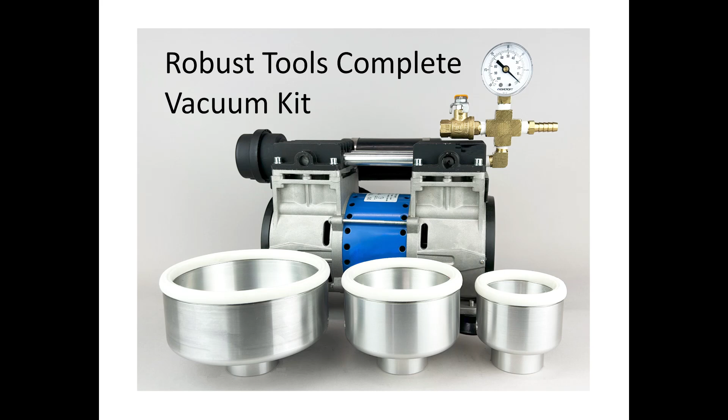Let's start with an overview of our complete kit. We have a two-stage 4 CFM oilless pump. There's a hardware kit that includes all your hoses and a filter, and there are three chucks, a 3¼ inch, a 4½, and a 6 inch. This is available as a complete kit, or you can buy all these components a la carte if you want to build your own system.

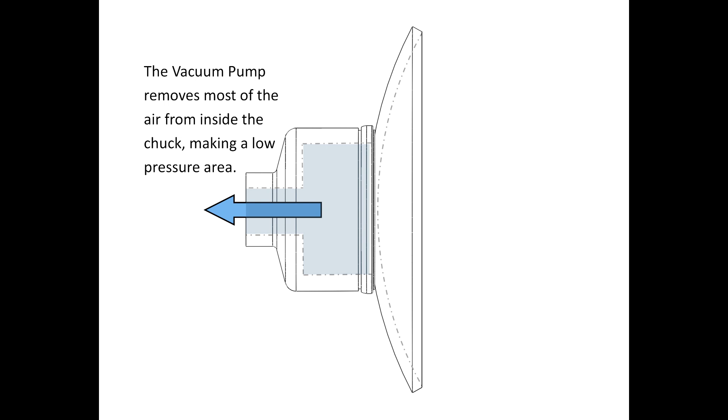All Robust vacuum chucks are machined from solid 6061 aircraft grade aluminum, and they feature a flexible 3D printed seal. Vacuum chucking works by removing air pressure from part of a system so that the ambient air pressure can work against the workpiece and hold it onto the chuck.

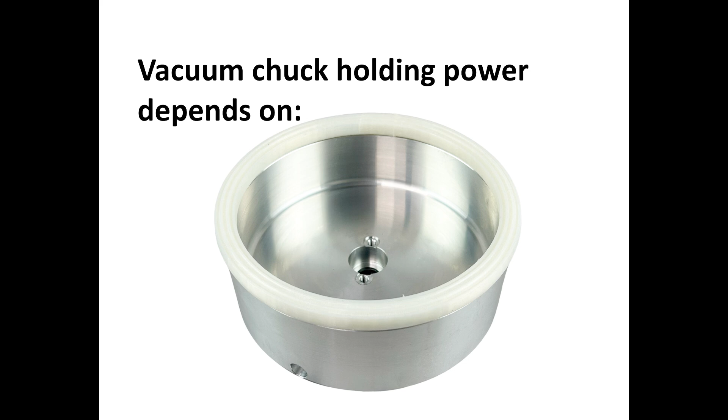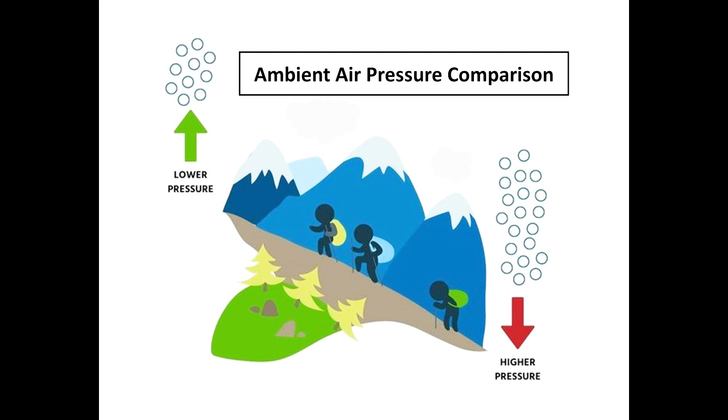Your vacuum chucking holding power depends on several things. One is the ambient air pressure. How big is your chuck? And what is the capacity of your system to generate a good vacuum? Ambient air pressure is going to depend a lot on your elevation. Down at sea level, you have 14.7 psi helping you, but you get up to elevations like at Santa Fe, you drop down to about 11.

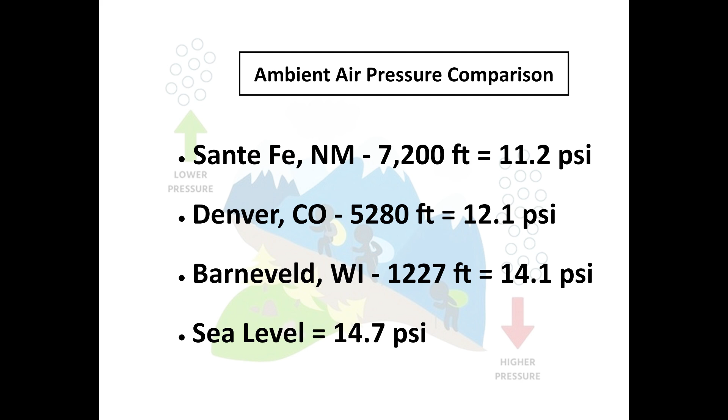All things being equal, the bigger the chuck, you have more surface area and more holding power. Our small chuck, 3¼ inches, will give you about 45 to 85 pounds. Jumping up to our 4½, you'll just about double your surface area, so you're at 85 to 170 pounds. And our big chuck at 6 inches can get all the way up to 320 pounds of holding power.

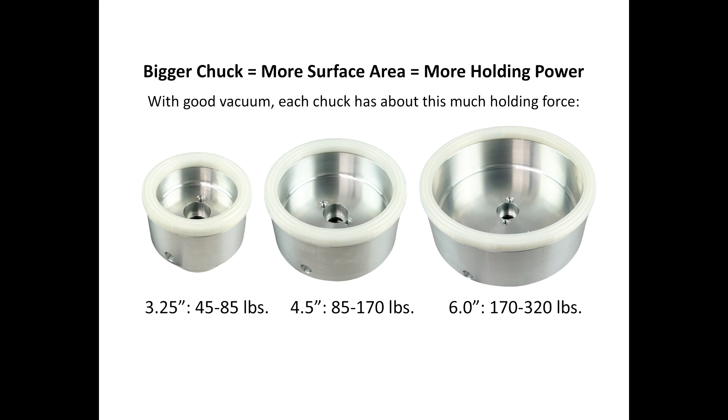Some other things affecting how well your vacuum system is going to work is the capacity of your pump, and are there any leaks in your system, including wood porosity. Let's look at the hardware setup that you get if you buy your system from Robust. We start out with a quality gauge so that you can know how well your system is performing at any given point. There's an inline filter to keep dust out of your pump.

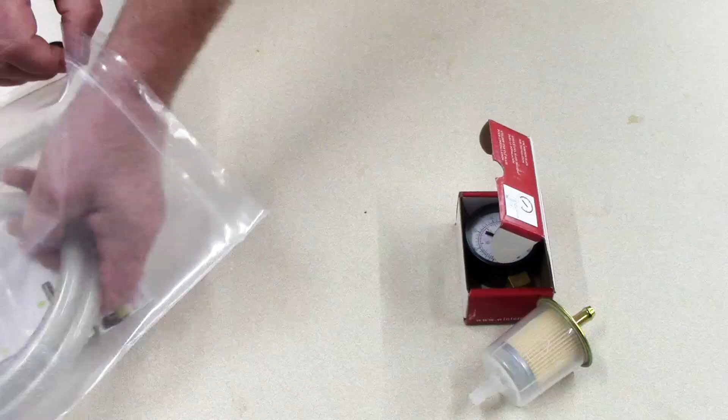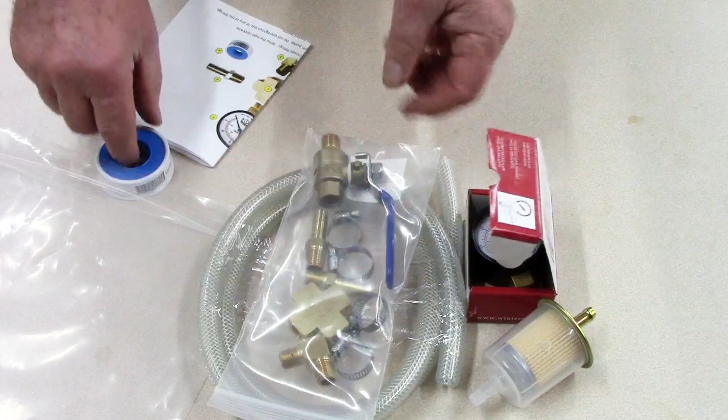There's some heavy-duty reinforced hose to connect everything together. All your hardware components, including hose clamps, etc., and your ball valve, more about that later. Some Teflon tape to make sure everything goes together without leaks, and a set of instructions. Here's the hardware kit and pump fully assembled.

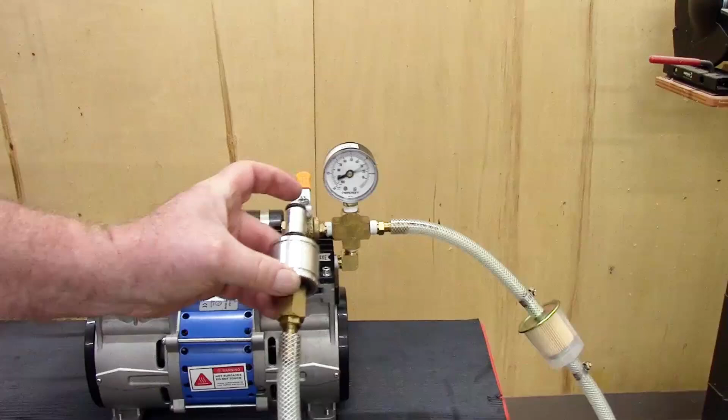One way to do a quick check on your system is to simply hold your finger over the end of the hose. In this case, I've got a vacuum adapter already installed, so I'm testing the whole thing. And you can see that the vacuum gauge is moving, and in this particular setup, it's going over to about 25, 26 inches of mercury, which is what I would expect at our elevation. I'm also demonstrating how the ball valve is used to bleed off vacuum, and we'll show how that's useful in just a little bit.

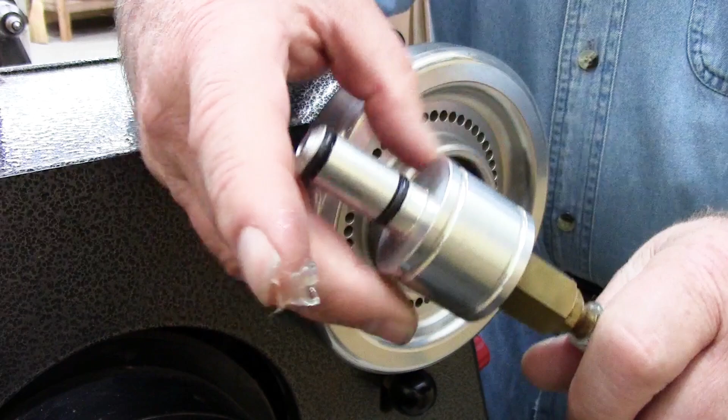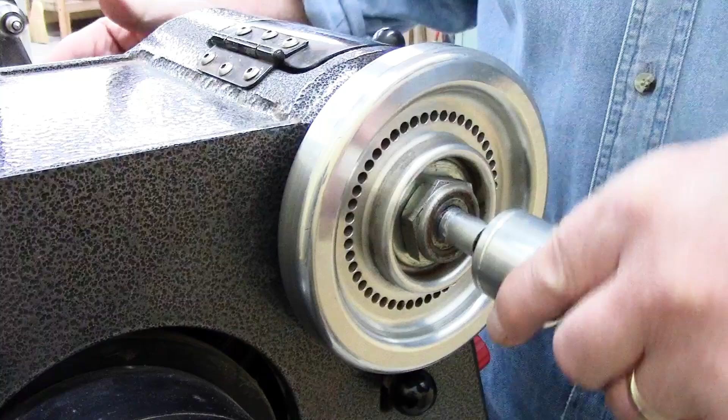Now, this is the rotary adapter that is applicable to Robust lathes and to Powermatic 3520s. I'm going to put a little petroleum jelly on the O-rings before I insert this. You can also use grease or other light lubricant. To use this style of adapter, simply slip it into the end of the spindle. There are 4 seals inside the housing that prevent vacuum leakage.

When you turn on the lathe, the housing will spin, but the hose will stay stationary. When you're done, just simply pull it out. If you don't have a Robust lathe or a Powermatic 3520, we've got a different system, and we'll show you that in just a little bit.

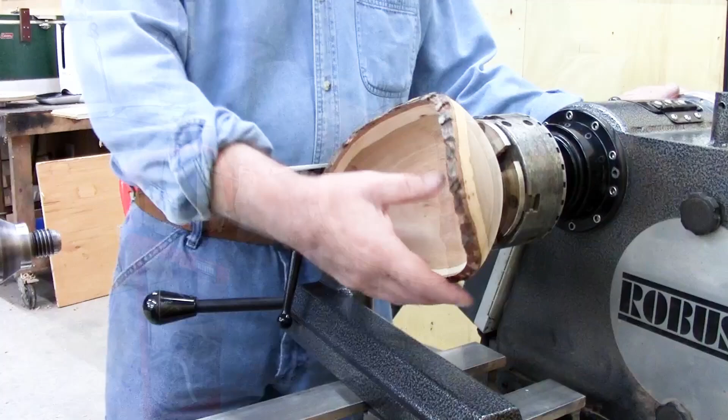Well, let's move on to some actual vacuum chucking. This is a natural edged cherry piece that I turned. I've sanded the inside and I've rough turned the outside. I'm going to leave it on the chuck, and I'm going to show you a reverse chucking technique. I'm going to use a chuck adapter.

It's threaded 3/4-10 on the inside and 1¼-8 on the outside. And I'm going to put that right on my live center. Any live center threaded 3/4-10, you can use one of these chuck adapters. And now I'm going to screw the chuck onto this end of the lathe, and I'm going to install my vacuum chuck.

And then I'm going to slide the tailstock up and have the piece make contact with the vacuum chuck. I'm going to turn on my vacuum, and then I should be able to unchuck the piece and pull the tailstock away and have the piece be fairly well centered onto the vacuum chuck.

For added support, I'm going to use my live center, but I don't want this sharp point. So the Robust live center is built so that I can take this point out and I'm going to turn it around and bring the flat end and have that stick out of the live center just a little bit. And that flat end is going to support the work and I won't be leaving a mark on the bottom of my piece.

You'll see I've got a little circle drawn on the bottom of the piece, and that's dead center. And when I bring my tailstock up, you'll notice that that circle is not running concentric. So what I'm going to do is use that ball valve that I showed you earlier, and I'm going to bleed off almost all the vacuum, and that'll allow me to shift the piece just a little bit and get it repositioned so that this base is running true.

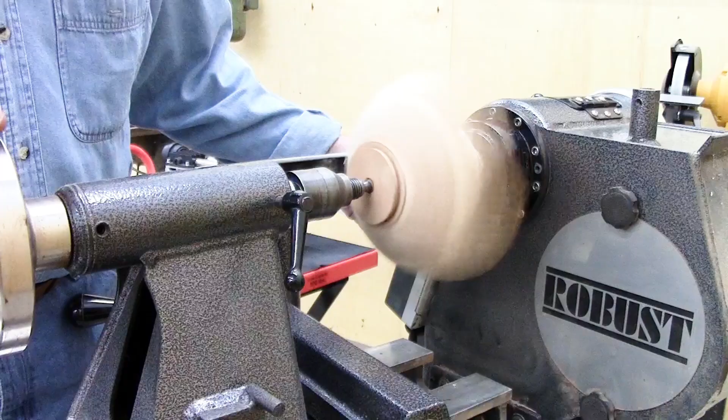It may take a little fussing around, but it's worth doing. After I've got it running to my satisfaction, I'm going to bring the live center up to the work so that it's just touching, just enough to make the live center spin. It doesn't need to apply any real pressure. The vacuum's doing that. But if there was any kind of compromise in the system, the live center would help provide some support.

Well, now we can get busy and turn the base. The thing to keep in mind here is that you just want to take light cuts. If you get too aggressive, you could throw the piece off of the chuck. This piece is going to have a recessed base, so I've turned away almost all of the tenon, and I've started my sanding. I wanted to show you how the vacuum will draw sawdust into the wood on the end grain and not very much on the side grain.

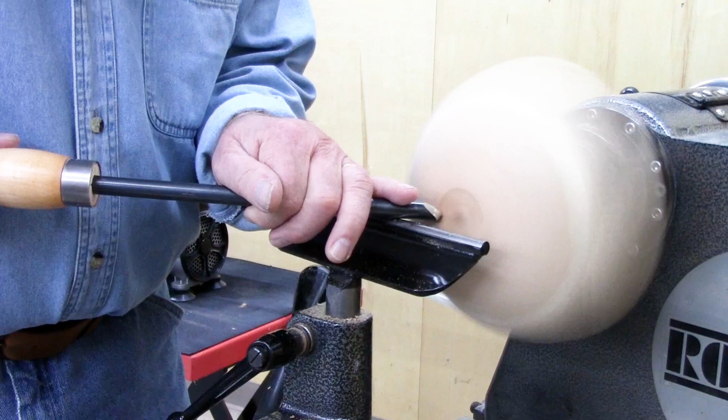This can affect your finish, and I wanted to make you aware of it. Some things to mitigate it are frequently blowing off the sawdust, and then also when the piece is finished, taking your compressed air and blowing it from the backside. Now to finish the base, I've pulled the tailstock away, and I'm going to take really light cuts. It's important to know how thick your piece is at this point because you don't want to poke a hole through it, lose your vacuum, and have the piece come off of the lathe.

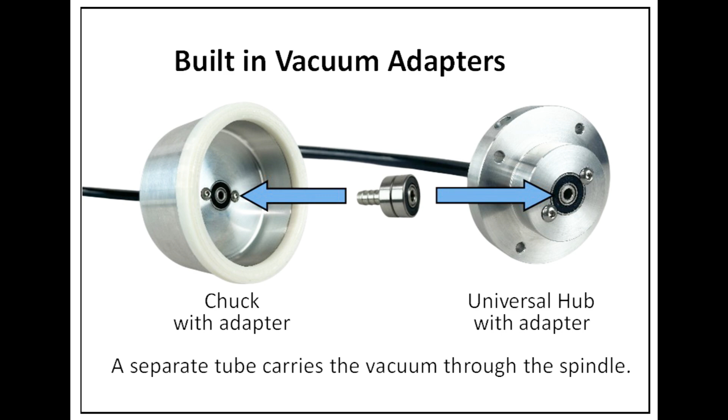So far, we've been doing our turning using the vacuum adapter built for Robust lathes and Powermatic 3520s. If you don't have one of those lathes, you might consider our vacuum chucks with built-in vacuum adapters. And we also have a universal hub that can accommodate the built-in adapter. I'm going to show you how to set up our universal hub, and then we'll also demonstrate the built-in adapter.

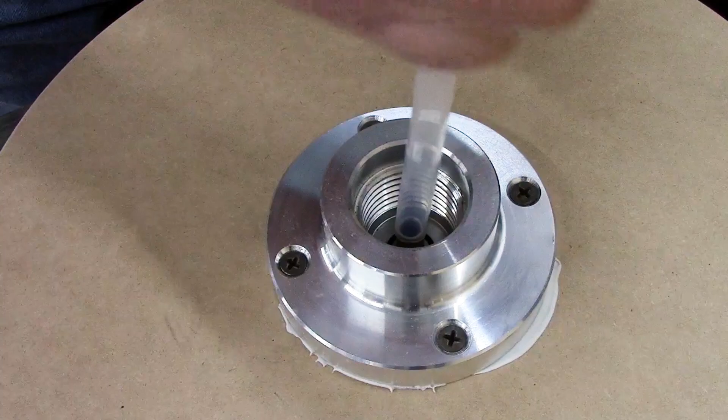So I'm going to use the universal hub to build a vacuum faceplate. I'm going to start by using a hole saw to put a 2-inch hole in a piece of MDF and then sawing it into a circle on my bandsaw. I'm going to apply a little silicone and then I'm going to put the hub into the hole and screw it in place. If you get a unit with an adapter, you also get a piece of tubing, and I'm going to install that now. And then the tube just slips through the spindle and you screw on your chuck or universal hub.

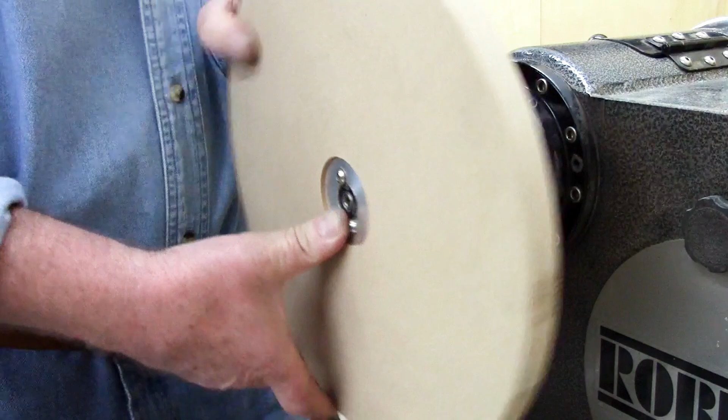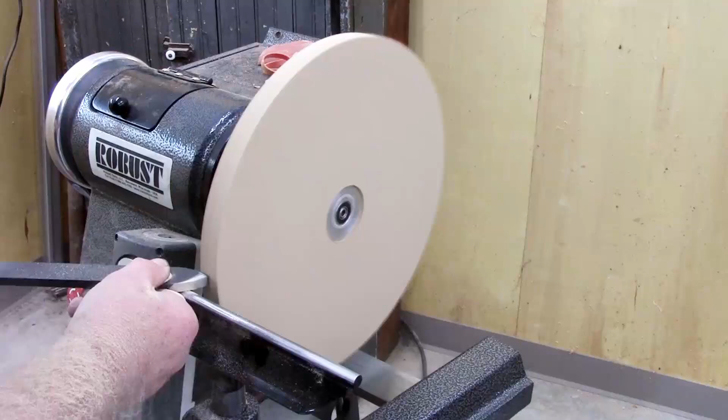Here's the easy part. You just take the hose from the vacuum pump and slip it over the tube. You don't need to install a hose clamp. The vacuum will hold it in place very securely. And you'll see when we turn the lathe on that the tube just hangs out there in the spindle hole. Now I'm just going to clean up the edges of the MDF and break the sharp corners.

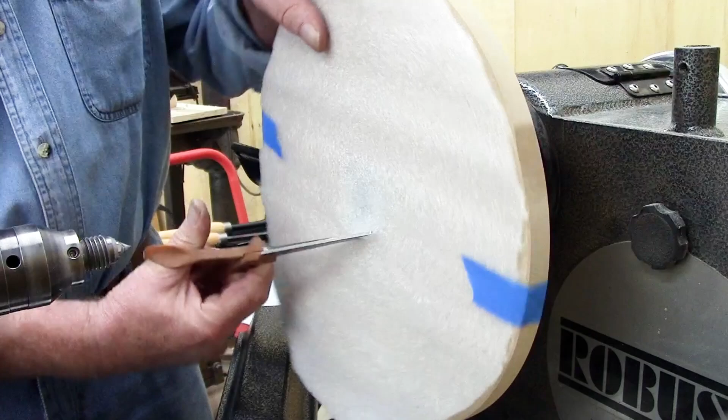I'm going to use some closed cell foam packing material for the gasket on this faceplate application. Be sure to cut a hole in the center for your vacuum to be drawn through. You'll notice that this is not glued on, just taped. I don't like to glue it on because as the gasket material begins to fail and wear out, it's hard to get off. A couple of pieces of tape is all you need to hold it in place.

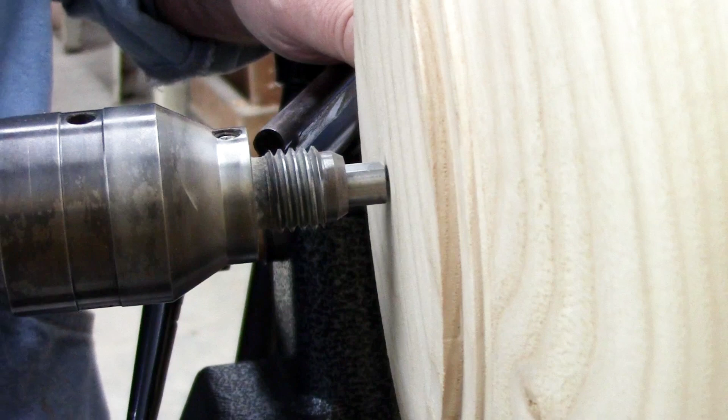The piece that I'm going to turn here is a piece of ash, and I've already got a center hole mark from my original turning. And I'm going to use that on the point of the live center to locate this onto the faceplate. I've got the flat end of the live center tip exposed again to support the work. Watch what happens when I increase the vacuum. The gasket compresses and the wood deforms a little bit, pulling it away from the center. So I'll bring the live center up until it's just making contact, and then when I start my cuts, they'll just be light cuts like before.

I'm going to make the final shaping cuts with a shear scraper. This is really great for refining the shape, and if you do it right, you get really nice, beautiful shavings. Now I've pulled the tailstock away so that I can refine my recessed base, and then I'm going to add a couple of little decorative grooves just for fun. We're all done now, and we can take the piece off of the faceplate. And you can do that by either opening your ball valve or just turning the vacuum pump off. Be sure you got a hold of it because it's going to fall on the floor if you don't. And there you have it, ready for finish.

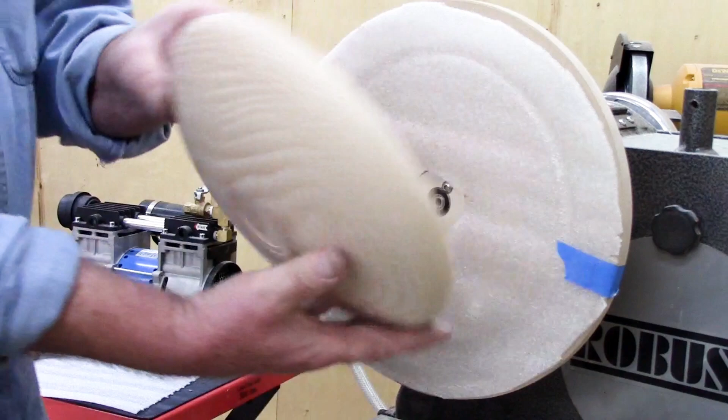Let's go over a few of the pros and cons of vacuum chucking. Well, the cons are it's expensive to get started, and you're going to be restricted to light cuts. You can affect the finish on porous woods, and voids or holes must be plugged. On the pro side, you have really quick setups. You can do multiple sized work on the same chuck. You can easily hold natural edge pieces. You can finish the base without tailstock interference. And we didn't cover this, but you can remount finished work. Speaking of finished work, here's the two pieces that we made in this video. I did put some dye on that ash piece, and I think it turned out really nice.